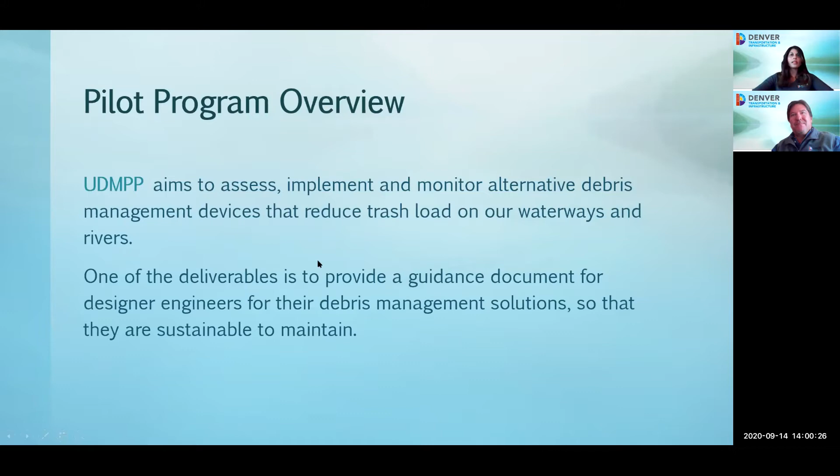So in this guidance document, this is all very preliminary, but what we're planning on putting in is a list of equipment that we have here in wastewater, and also maybe some preferences, like what type of pieces of equipment that we'd like to deploy, such as a vac truck or something like that.

We'd like to also include some design suggestions, such as offline, installed at a drop. We want to also have you guys help us standardize. So some design suggestions may be, make sure you include this type of configuration or that type. And we also love some feedback as well.

If you're taking notes of what works and what doesn't work, this would help that section. We'd also suggest that you consider dry weather flows itself, because dry weather flows can actually make it very difficult to maintain because of all that water that we have to keep up with, especially if we're deploying a vac truck. It's very difficult for a vac truck to keep up with those dry weather flows.

Another thing that we might include is a list of criteria for decentralized devices. So what I mean by that is if you've got a trash bag within an inlet, we might put in, this is how much clearance we want from the throat of where that trash bag starts, things like that.

Possibly, we might even include a conclusion on our preference as to whether we prefer maintaining decentralized or centralized devices. We would need to include quite a bit of data in order to make that type of conclusion, so that's definitely tentative, as along with the rest of this outline.

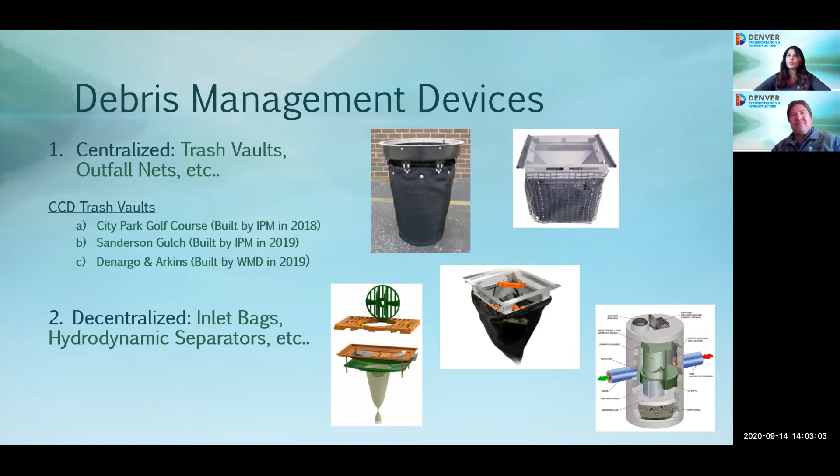So decentralized devices, what I mean by that is inlet bags, hydrodynamic separators, those kind of things. And here's a few pictures of the different type of devices right here.

So timeline, we started this program about a year ago, and we enlisted our staff engineer, Kevin Monaweck, and he did quite a bit of research on all the different type of debris management devices out there. And through a process of approvals through our management, we decided on piloting our own. We do realize that there was quite a bit out already implemented and built, but we really wanted to kind of

experience that whole design process and construction process so that we could provide the best type of guidance for you guys and also other municipalities. So we settled on two, one decentralized and one centralized. So we decided that we wanted to build our own trash vault itself, and we installed a few bags over on Evans. This year is all about monitoring and data collecting, and also cataloging the existing debris management devices and keeping track of the maintenance of those.

So that's what this year is all about. By the summer of 2021, we're hopeful to actually get a draft guidance document. We would love an opportunity to collaborate with private and other public entities to create that draft. This doesn't necessarily have a deadline, because the more time we have, the better this document is going to be and the better resource we can be to you guys. So our plan is to continue this program as long as we have to.

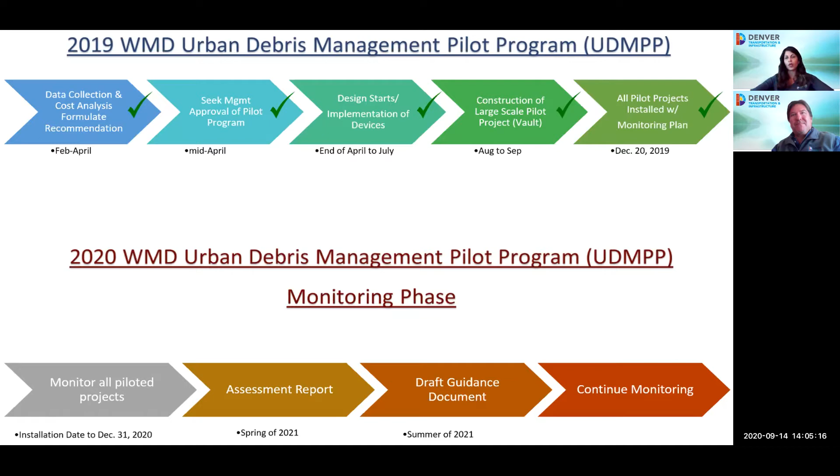I mentioned earlier that we settled on the one pilot, which was the trash vault. There isn't a book off the shelf or a manual that says, given this basin and this type of land use within that basin, here's how much trash you're going to get. We're all just trying to make this stuff up as best as we can.

Some acknowledgments on our planning: Kevin Monaweck and also Raul Rodriguez helped decide on what criteria we would use to select a location to build this trash vault. Kevin actually used street sweeping data to create our own heat map, the correlation being that high volume of street sweeping related to high volume of trash. So we used that information.

We also wanted to pick a large pipe size with a large basin, hoping that it would produce quite a bit of trash as well. We wanted to select a pipe that had a grade differential change, or even a drop manhole, to minimize any impact to the hydraulic grade line.

And then we wanted to select a spot that didn't have any dry weather flow. Because we had the entire city, we could choose where we put our vaults. Not everyone can choose that, so just be mindful of that when installing your vault. We also wanted to make sure we had the proper pipe material and condition, so that whenever we tapped into that existing pipe, it wouldn't compromise the structural integrity at all.

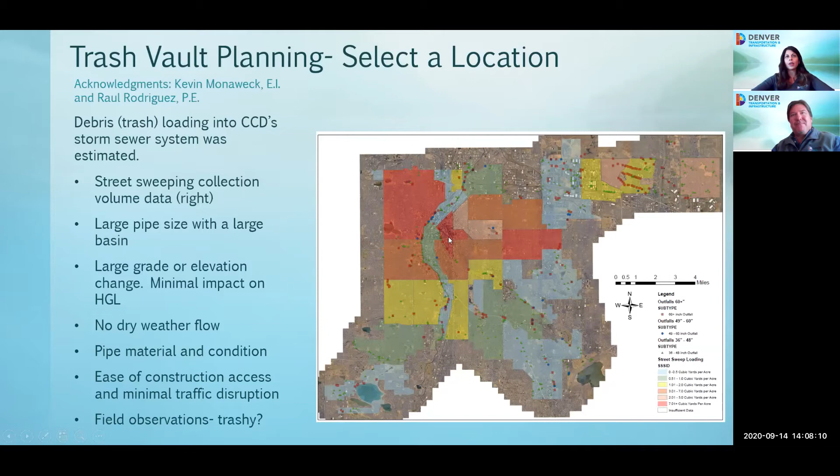So Denargo and Arkins was in the red area on the heat map, had a large pipe size with a large basin. It actually had a drop manhole - Kevin sifted through quite a bit of as-built drawings we had in the office, and he found a drop manhole. We found a place with a 66-inch pipe and a 54-inch pipe, so we could draw the trash from both of these large pipes. We also found that the 66-inch and 54-inch were both in good condition.

This particular area has kind of low traffic - it's not like Colfax or Brighton Boulevard. So it'd be a perfect site for our in-house construction crews. We also confirmed that it was trashy.

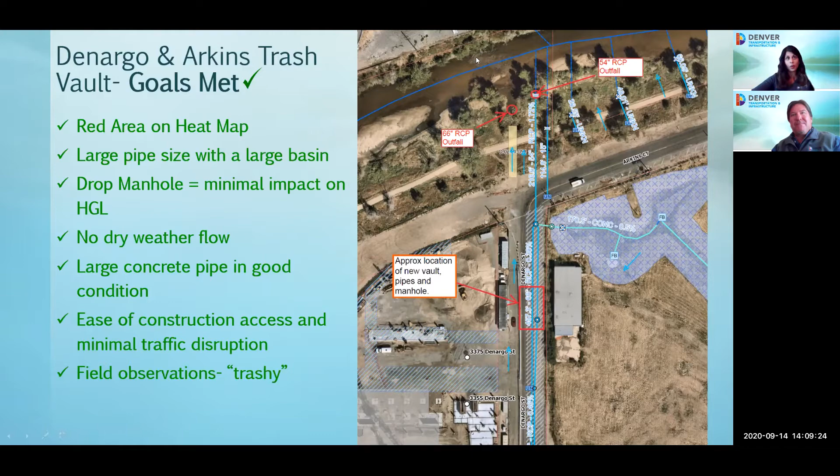We did in-house design on this because we wanted to experience that firsthand. Credit goes to our lead designer, senior engineer Mark Gehrke, who came up with this design. We wanted it to be offline. The lower flows would be taken off into this 24-inch pipe, then diverted into the trash vault along with the 54-inch, and then with gravity flow through this and into a 30-inch pipe and back into the 54-inch pipe. Because we had that drop, we were able to do that.

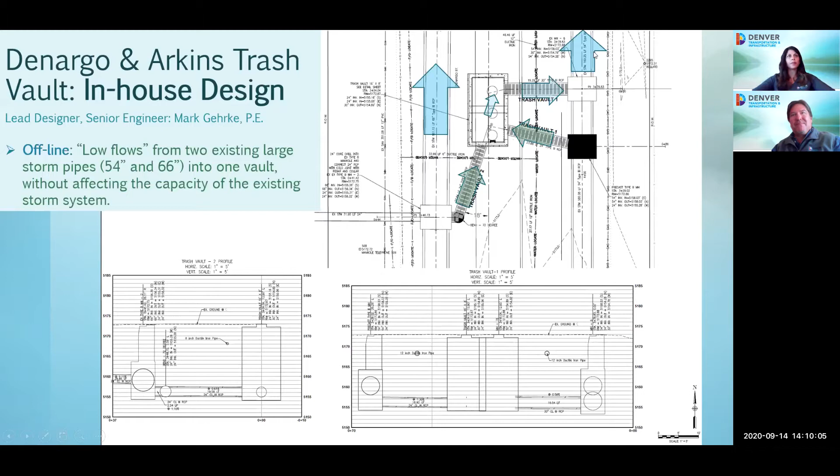In this design, we followed Mile High Flood District trash rack guidelines. We designed for an overflow, and we also drained the trash rack so the whole vault could be completely drained. The trash rack doesn't actually go all the way to the bottom of the concrete vault - it has a gap, about a 1-inch gap, to help promote a drained bottom and reduce the risk of transmission of disease pathogens from vectors such as E. coli.

We also spent quite a bit of time and effort on placing our manholes. Right here, there are these long rectangular things - they're supposed to represent our vac hose.

So that's the reach of our vac hose. And the way that we placed our manholes, you can park a vac truck and reach every corner of this trash vault. So you should be able to clean the entire thing without sending someone down with a confined space entry. That was really important for our maintenance crews to be able to achieve.

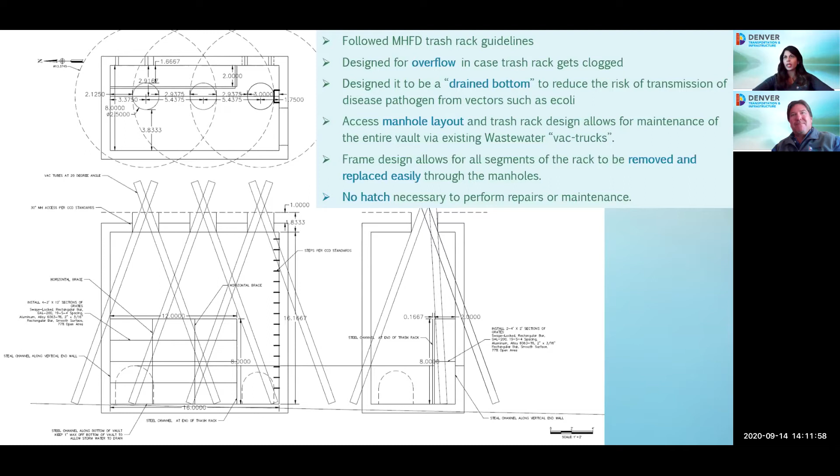Also, the frame design, credit to Mark. If we had any issues with the trash rack itself, say we wanted to swap it out or there was an issue with it, we actually put them into different segments so that they could be removed and replaced easily through the manholes. So there's no hatch necessary to perform any structural repairs or even to access for maintenance.

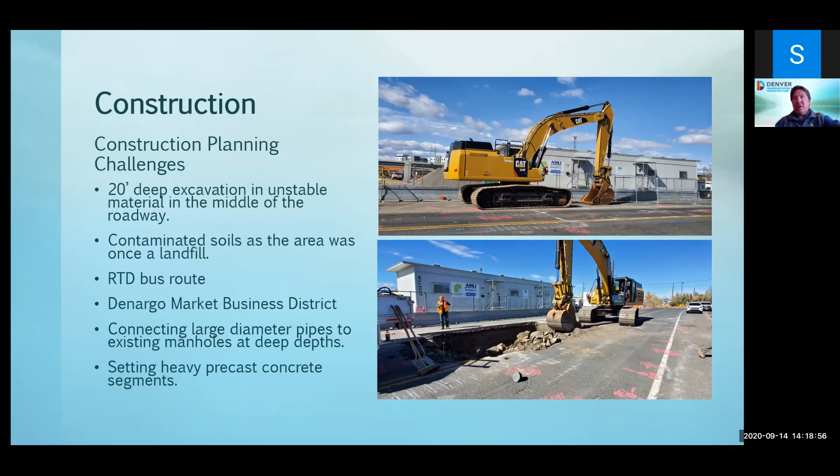Connecting large diameter pipes to existing manholes at very deep, dangerous depths, and setting heavy precast concrete. Here's a picture of the excavator as we got started with our excavation. We were able to shut down this portion of Denargo right here where the vault was to be constructed.

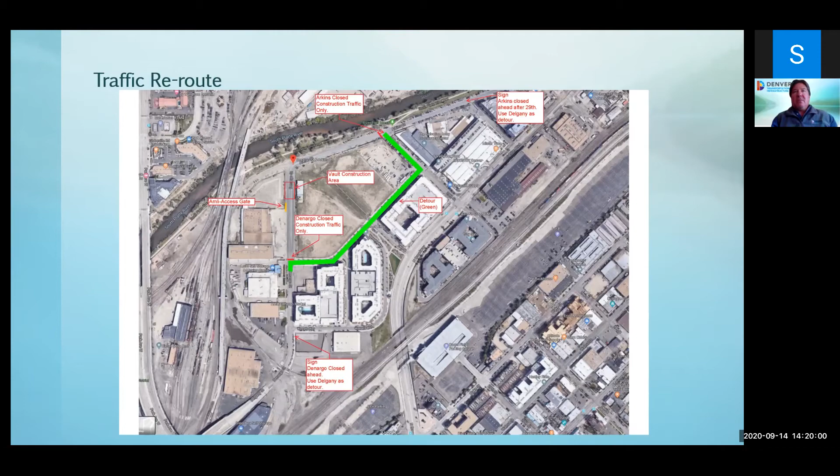We realized that Delgany Street was a private street owned by the Denargo Market Business District. So Mark Gerke and I went down to a board meeting and showed the board our plans and described to them what we were going to do and how long it's going to take, and we were granted permission to get this road closure.

Construction challenges and our solutions: depth of the excavation. I determined we should use slide rail shoring. I thought that would be the only safe way to excavate and shore up, protecting our crews at these depths.

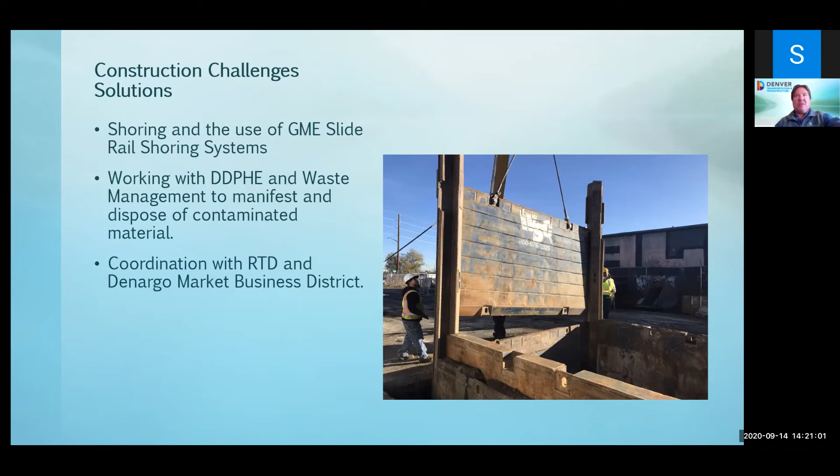Existing material consisted of contaminated material that had to be manifested and disposed of properly. I had to work with the Denver Department of Public Health and the Environment to set up an account at the dump and get this stuff manifested and hauled off site. And coordination with RTD, since we interrupted their bus routes, and the Denargo Market Business District.

We selected the shoring because we were able to obtain the geotechnical report for the adjacent development that just so happens to be constructed adjacent to our trash vault, a multi-family apartment building. We got the geotech report, looked at it, and noticed that from 1 to 15 feet, we have variable soils, debris, and contaminated material.

All that material had to be hauled off. From 15 to 40 feet, I see poorly graded sands with no clay, little silt, meaning very unstable, very loose, very tough to shore up. So this was another reason for us to use slide rail systems for this vault.

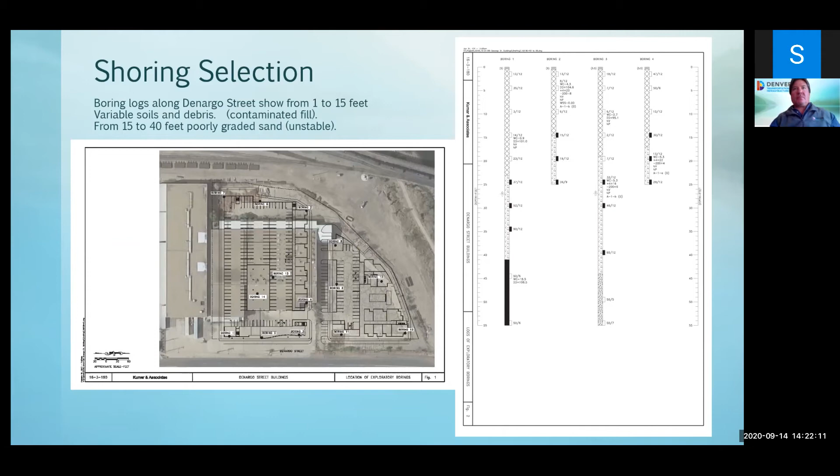Here's the next thing, mass excavation and haul off. We used our big rented excavator and our own trucks to remove the material and haul it off to the Denver Arapahoe disposal site.

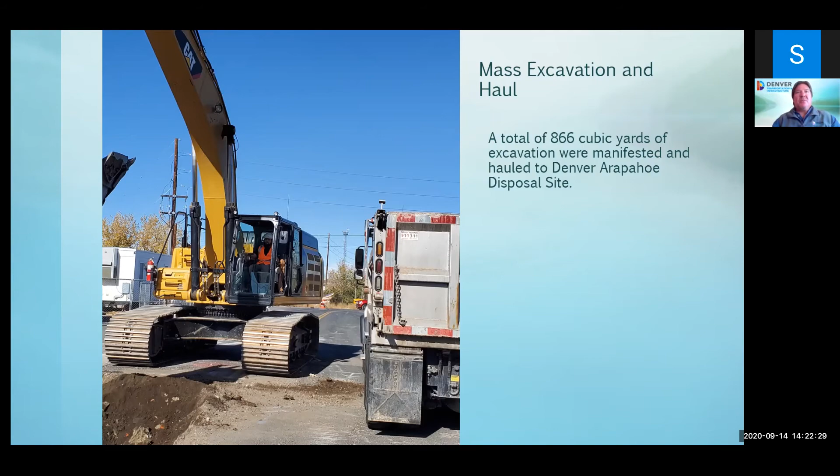Here's the slide rail going in, a short video of the excavator banging the vertical rails in. The most important thing with this type of shoring is square and plumb. So we kept the rails plumb with levels, and we kept the shoring square by the use of string lines, trigonometry, right triangles, whatever we can do.

We found that we really did a decent job of installing the shoring, since when it came time to remove it, the rails came right out. The slide curtains came right out. They were not kinked or bound in any way because of the method of keeping it square and plumb. So that's very important when you're doing slide rail: square and plumb.

Here's another shot of the slide rail going in. We have all 4 rails in. We're utilizing one of our Cat backhoes to hold up some of these side panels, and using the big excavator to plumb up the vertical rails.

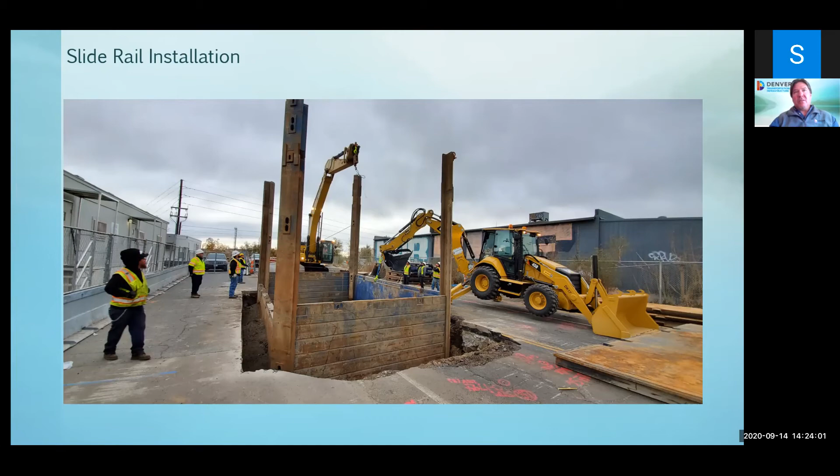We got the slide rail in, excavations to depth. On the right side of that left picture, we have some sheet piling in there, which we were able to put in so that we have access holes for our pipe penetrations. You can lift up the sheet piling, top a pipe, come through the knockouts in our precast to connect. Photo on the right is just 12 inches of 3/4 inch rock bedding, compacted and consolidated with a vibratory plate compactor, ready to set the vault.

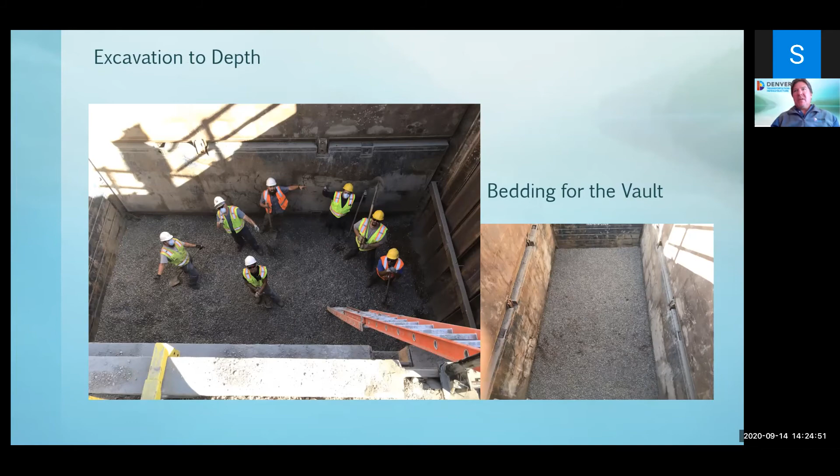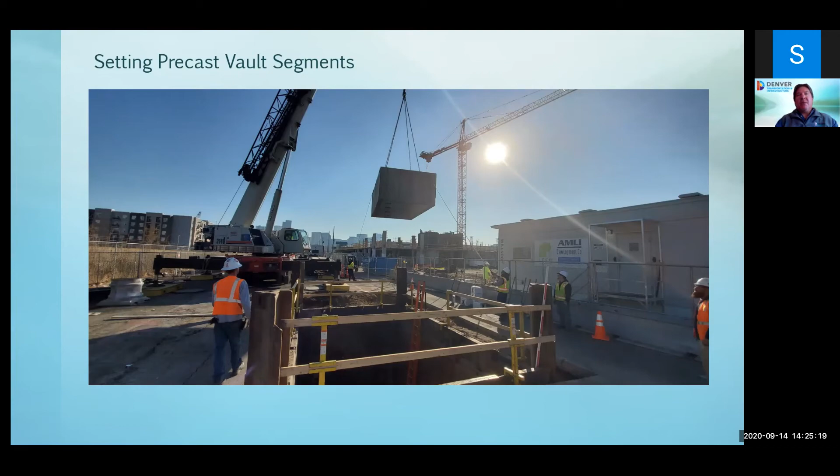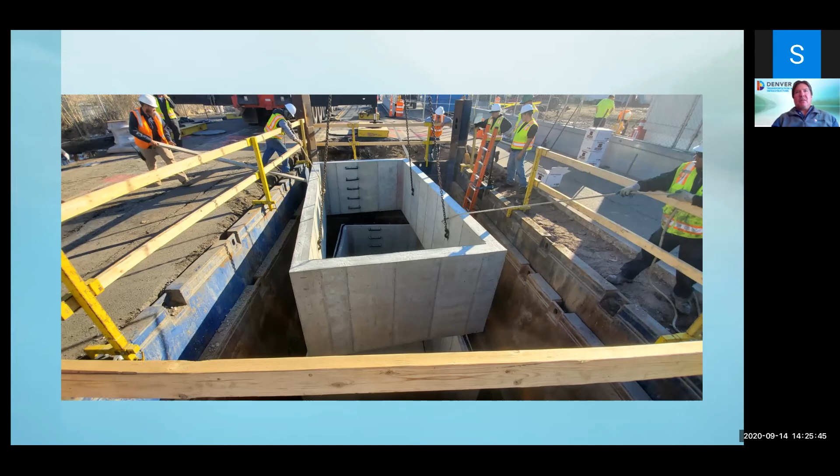Now, NC Precast cast our vault. 110-ton crane setting precast concrete. The vault itself consisted of a base, 3 wall sections, and a top. Here we are setting the last wall section, using waterproof type joints with RAM-NEK between each section of precast. Again, we have to make sure things are straight and plumb. Got the slide rail in there, and it's very safe at this point. The wall sections were 27,500 pounds each.

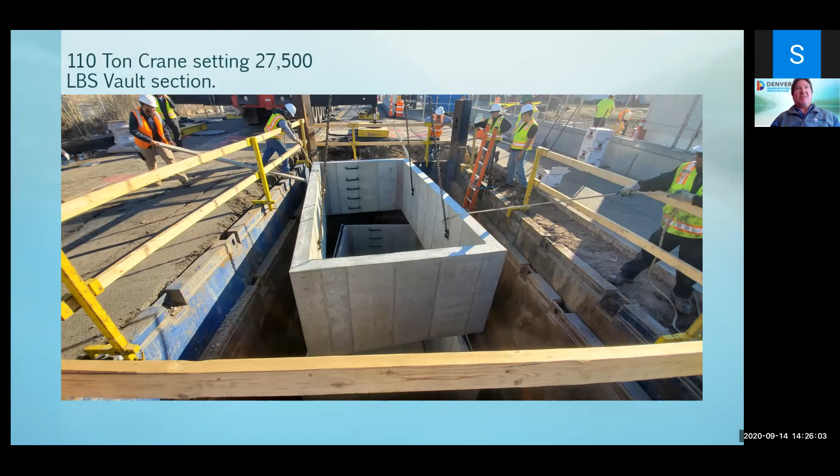Lateral pipe connections: 30-inch diameter cores were drilled through 2-foot thick manhole bases - one 30-inch diameter core and one 24-inch diameter core.

I'll never forget, it was Christmas Eve. I scheduled a concrete coring company to come in and core this hole. This guy was down there 20 foot deep in shoring, coring through 2-foot thick concrete. He looks up at me and says, 'Do you have anything like this scheduled for New Year's Eve, Rick?' I felt so bad, but we did it, got it done.

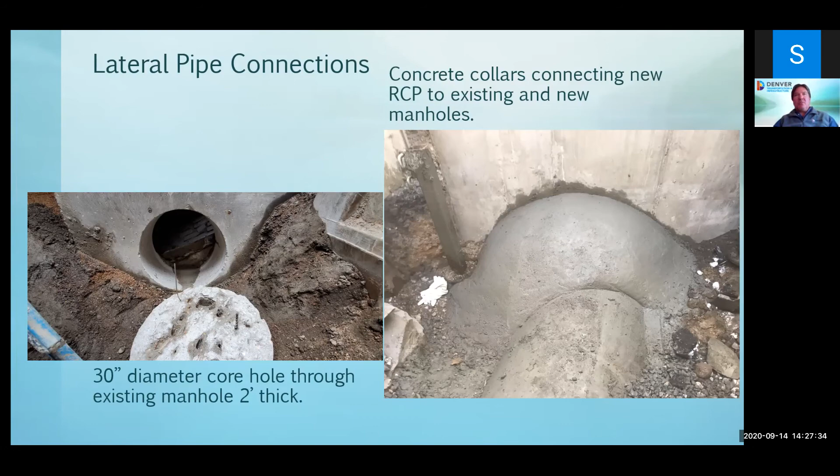Clean select fill was supplied by the Central 70 project. They provided 650 cubic yards to this project at no cost, delivered it to us. We compacted it and placed it. That was a good deal and a great cost savings - no trucking, no material purchasing. It was all clean fill, certified by the state.

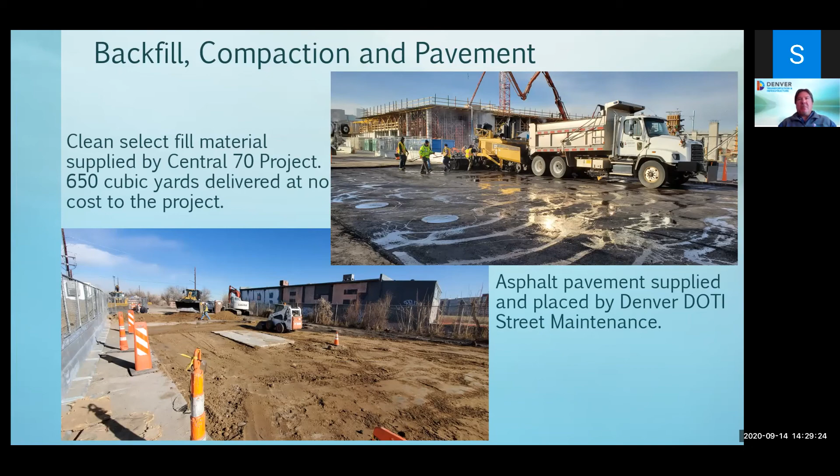Picture on the right is our own Denver Department of Transportation and Infrastructure street maintenance teaming up with us to make this project a success. Installed 130 tons of asphalt pavement, 3 lifts, 12 inches thick. Got that laid down and striped by Denver Traffic Operations. It was a team effort here.

After a dry summer, we weren't getting much rain, but on July 15th we knew there'd been some rain in the area. So Mark Gerke and I went out and got Saul and Adolfo out there, put some cones out, put a truck out there, opened up the vault, and found that it's working very well. It's collecting plenty of trash there.

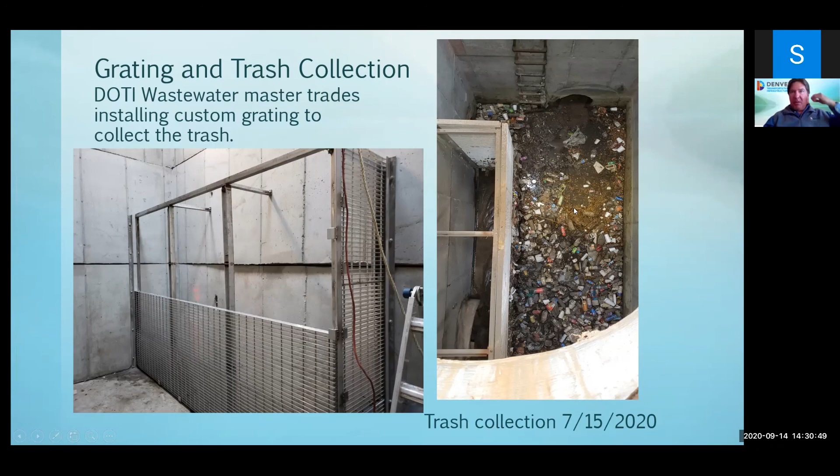As you can see, the top of the grating is left open in case of a huge storm or in case the grating gets clogged. It would end up going up to this elevation and spilling over unscreened.

Here's the total trash vault cost and duration. Labor costs of $101,800. Equipment, $70,257. Material costs, $56,597. We did have some subcontractors - Winslow Crane, Kumar and Associates for testing and Geotech, and Concrete Coring Company to core the large diameter holes into the concrete.

Total cost under $250,000, at $233,918, saving the city and taxpayers money by performing this work in-house - in-house design, in-house construction. Lesson learned: don't make a big hole in the street during the winter. We did get an early winter start in the middle of October last year. Began construction October 15th, 2019 and completed January 21st, 2020.

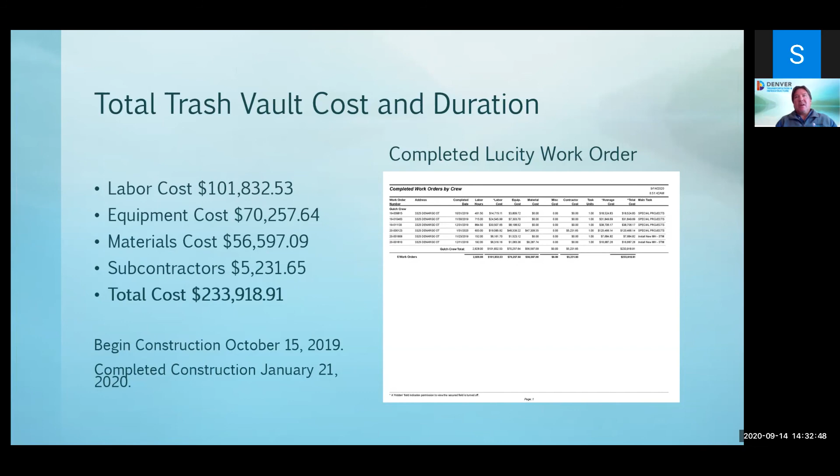Here's a little shot on our right of our Lucity work order. We tracked all our costs in Lucity daily - every single labor hour, every equipment hour, every subcontractor cost, every material cost is all tracked in Lucity, our asset management system. All right, I'll give this back to Selena.